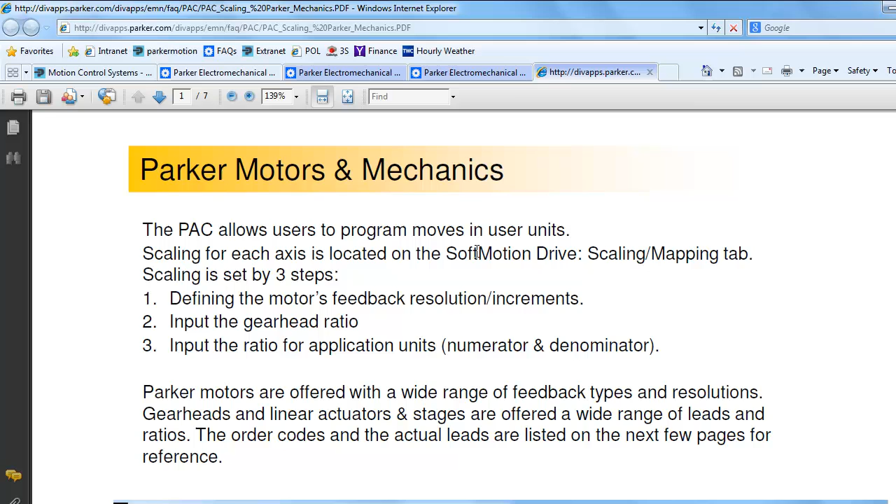And then under PAC you'll see the quick start. Go ahead and open that. And then you'll see setting scaling for Parker Mechanics. Go ahead and open that. And within this there is a PDF for the scaling for the Parker Mechanics. If you go ahead and open that up, this is a document that shows you how to set these numbers.

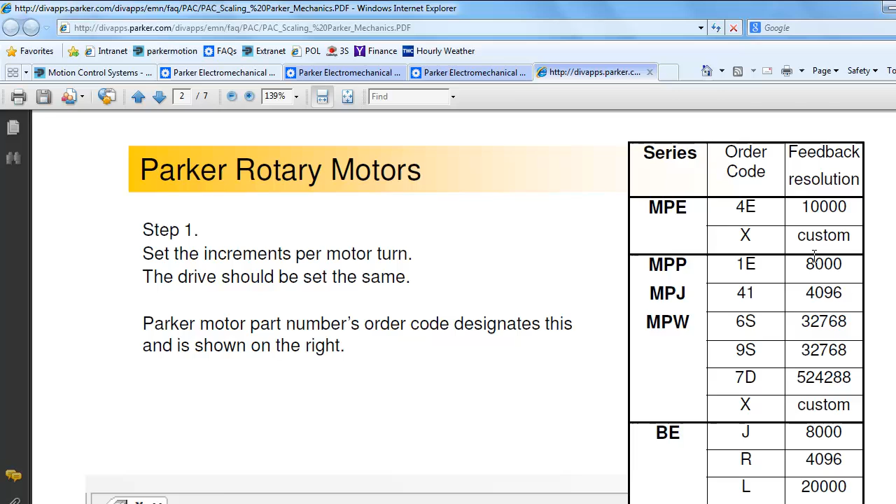This is based on the motor feedback resolution. So on page 2 it has the feedback resolution for the different motors and what those all are, and those are based on the letter on the part number on the motor, which will be on the side of the motor.

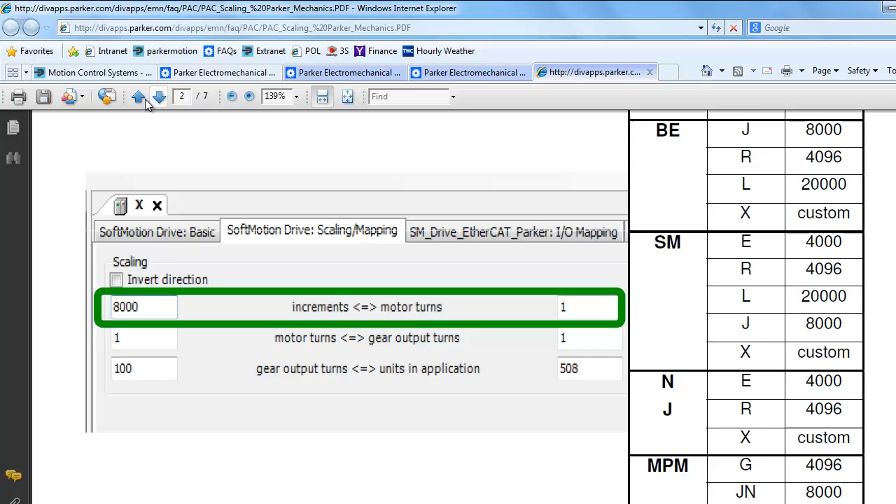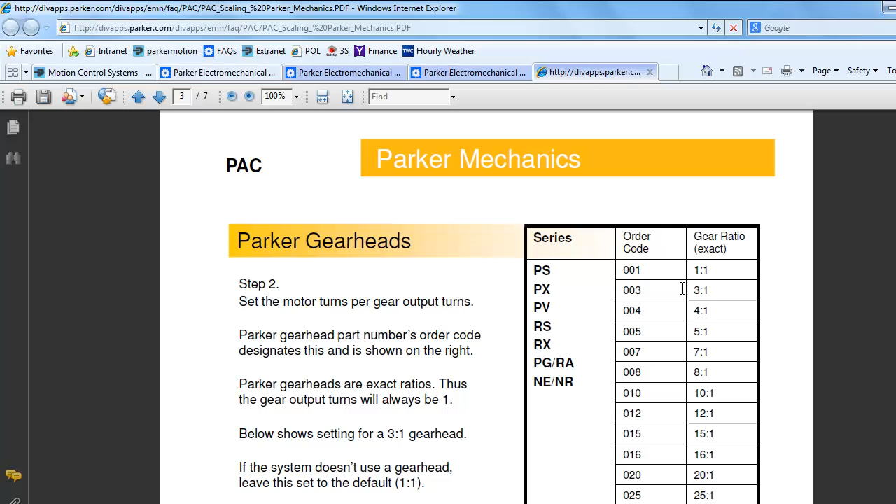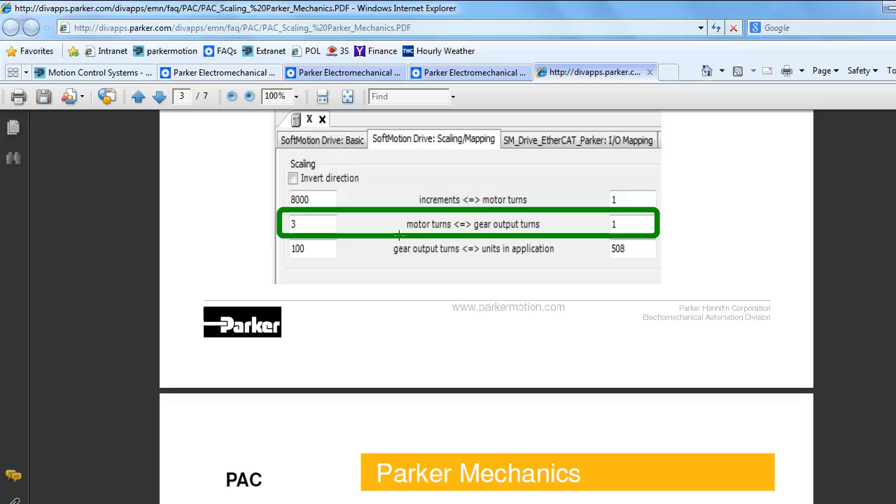If you have a gearhead, the order code in the very middle part of the part number will indicate the overall ratio, such as a PS60-003-S2. It's a 3:1. That is an exact gear ratio on there. So that would be set to 3 motor turns per 1 output turn of the gearhead.

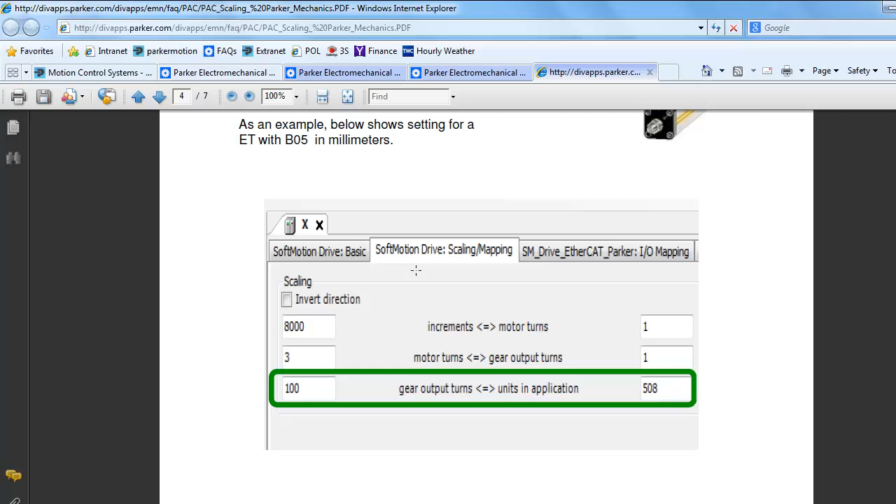And then for the last portion, if you're using an actuator or a precision table, the gearhead output turns per units in the application. This is set for an ET cylinder with a B05, which is a 5 rev per inch ball screw. So this is set for millimeters, and on the next few pages you'll see, okay, for the HD series, the order code, which is a D02, that is a 5 millimeter per rev ball screw, and then the denominator and the numerator for millimeters, and then for inches.

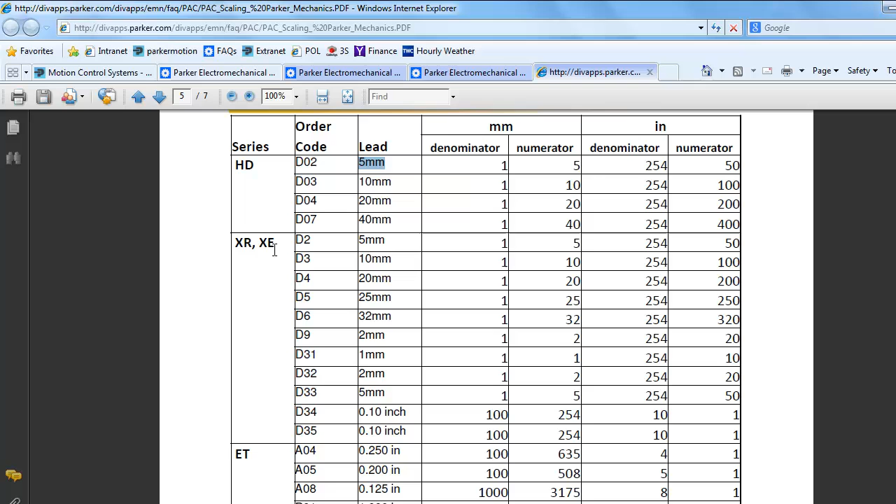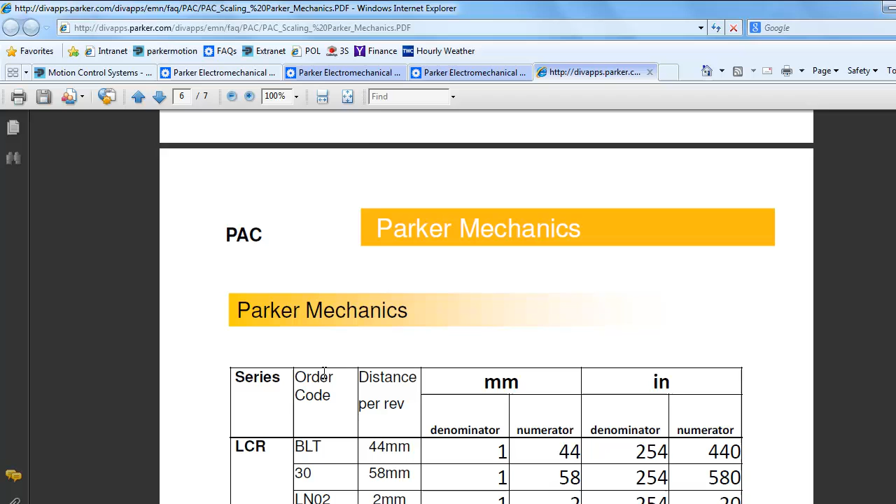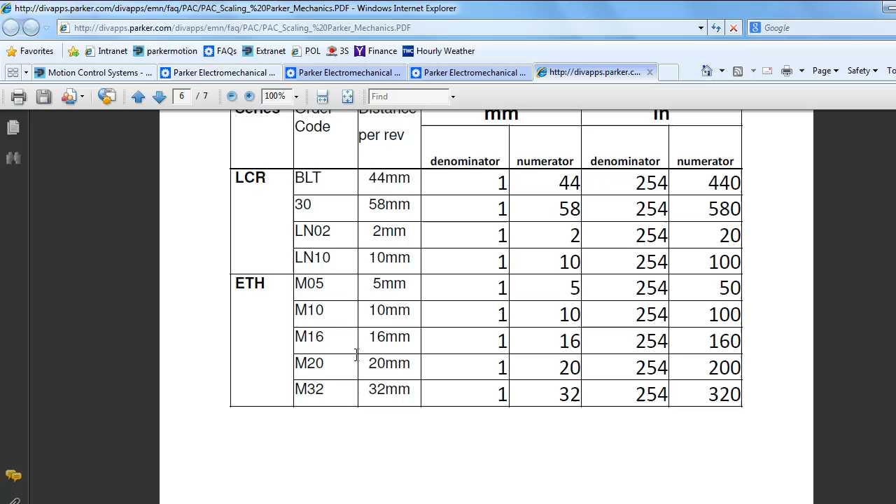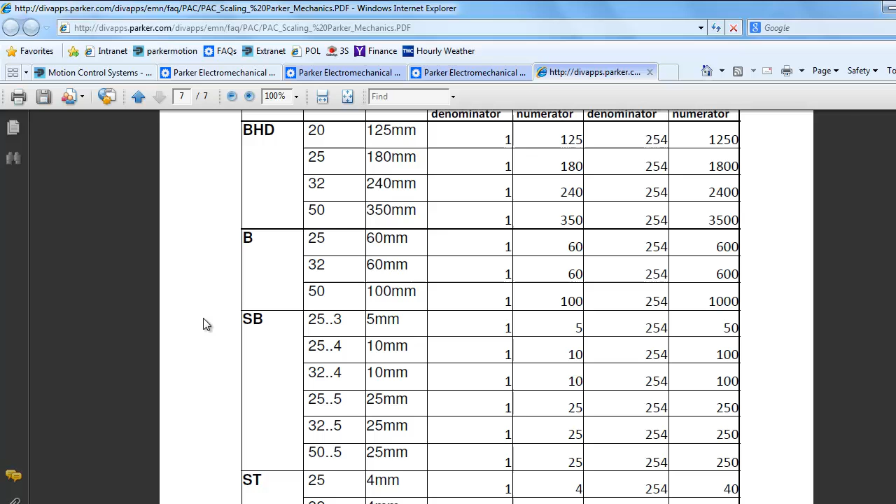And so you can go ahead and set those for the HD, the XR, the XE, which are the 400 XR and XE series precision tables, the ET electric thrust cylinders with the different screw options on those. Page 6 has the LCRs with the belt drives and the lead screw systems, and then also the ETHs with the metric ball screw options on those. And then page 7 has the newer Origa OSPE with the different carrier options and screw and drive options on those.

So let's go back to the Parker Automation Manager software. So this is set to 100 and 508 for the numerator, so 5.08 is the overall ratio. I don't have a gearhead in my system, so I've left that as 1:1. And my motor is a BE motor with a J encoder, which is 8,000 counts post quadrature. So my C3P Compax 3 servo manager is set up to be in 8,000 increments per revolution.

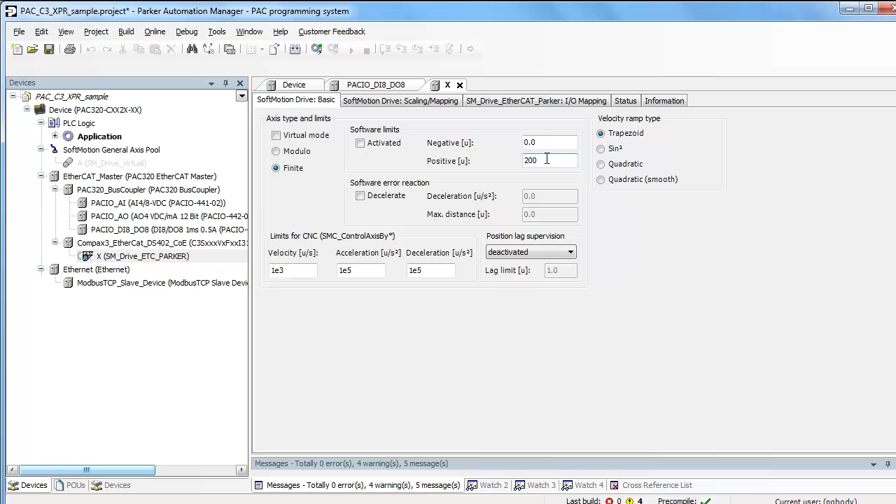And then the soft motion axis under basic, my travel is from 0 to 200. So this is based on the stroke length of the actuator or the precision table. I have 200 millimeters of travel. The homing is done at the drive, so the PAC controller will send the request to the drive, and then the homing is done there. So the limit switches are actually going back to the Compax 3.